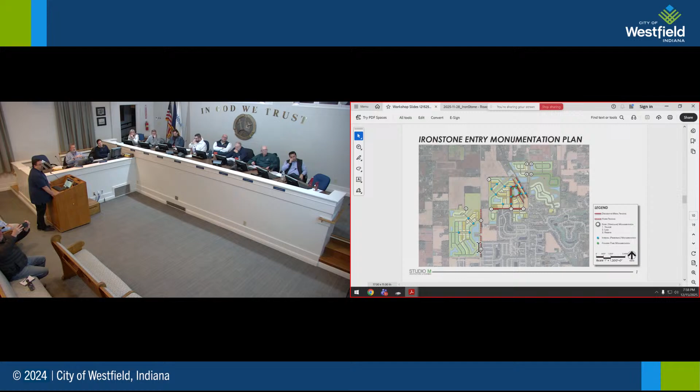If we look at some of those details, this is the design detail for the metal fencing and columns along 206th Street primarily, and at the north end of the development, marking the transition between different areas within the community. That same style of brick and stone columns carries throughout Ironstone at the four corners where you enter the site from the public walk—this element extends over the sidewalk. And this design element, similar to but not identical to that same design vocabulary, is carried across.

This would be at the lakes, at the two entrances along Six Points Road and the one entrance along 206. This is a detail regarding the fencing, identifying where it would be in common areas that the builder will develop.

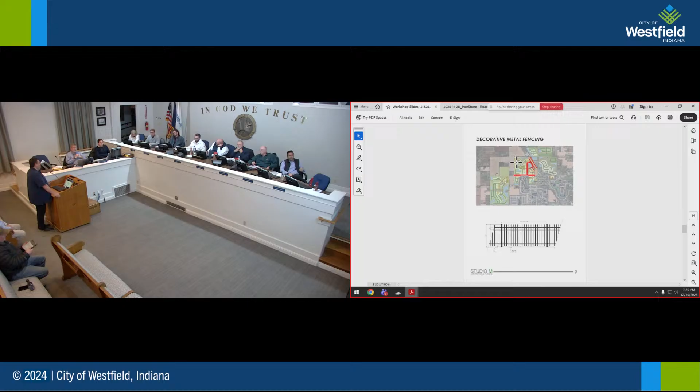One of the other questions we had was what kind of restrictions there would be regarding fencing for people on their lots. The restriction would be for metal fencing, similar in character to this. There wouldn't be a situation where you'd have vinyl, wood, and other fence types throughout the development.

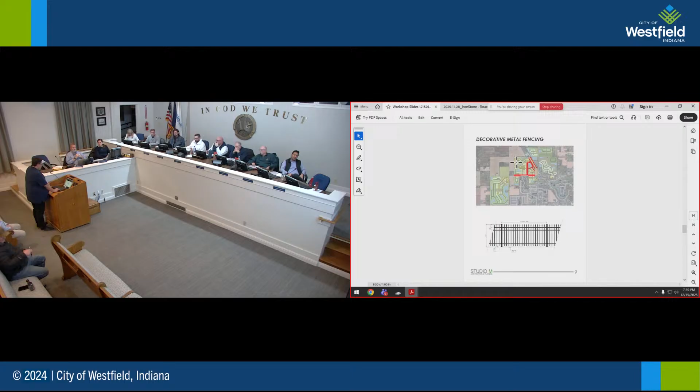Another big question was regarding open space, and we provided another exhibit at the Plan Commission meeting identifying where there's open space throughout the development. Typically, underlying zoning classifications in the UDO require anywhere from 8% to 15% open space. Proposed here is a minimum of 20% throughout the development, representing about 22%, not including the school facility, which is not counted as open space.

There's approximately 60 acres of open space in the lakes, and then you see the other two distribution elements across the site. The open space amenity east of Horton Road is predominantly through the low-lying area. There's actually some flood zone in there, and it's wooded through this space.

You'll see that in a minute in our tree preservation plan, but these are the areas of open space. The ordinance says open space shall be as illustrated in the concept plan. This is just a pull-up from the concept plan that helps us communicate effectively where there would be open space within the development, rather than relying on people figuring that out by looking at the concept plan.

This next exhibit is tree preservation areas. There's existing trees on the site predominantly east of Horton Road, which is the area I just talked about. All the trees within here will be preserved.

There is a stand of trees along the north perimeter of the real estate, and we're providing tree preservation along that north perimeter. There's also a stand of trees on the site here, where this element you see is a stormwater detention element.

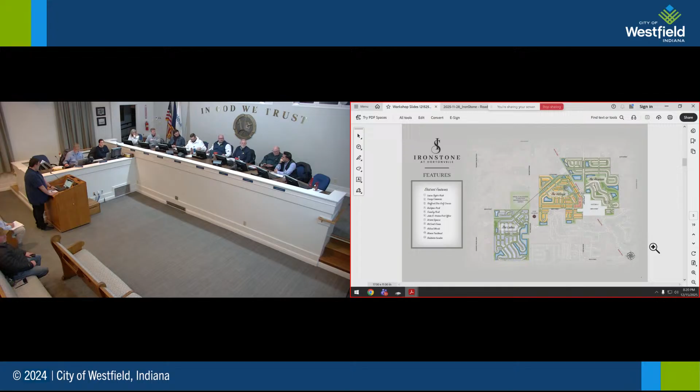Mr. Bunkefist: Yeah, a few questions. Number one, it's kind of hard to see, there's a slew of colors on this map. When we're looking at the villages, is it safe to assume that all of those that flank the Monon Trail in that northeast corner are townhomes? Because of how some of the lines are cut, it blends like it's maybe a type F. That's like confirmation on the Monon frontage right there. Yep, so when you zoom in, it looks like that is all type A townhome intention. Is that correct? It is. Okay, perfect. And so then, of course, that'll be alley loaded, so the fronts will be facing the Monon. Is that accurate? Yes. Okay, so the alley you see is the narrow strip behind.

The homes would face the Monon here, and it would face the backside. To add some specificity regarding that Monon Trail frontage, it wouldn't be a situation like in Carmel, where you have front sidewalks coming out onto the Monon. This would be a preservation of the existing trees in the Monon right-of-way with a separate sidewalk beyond that, so that it would collect and only connect to the Monon at a couple of select locations. Understood.

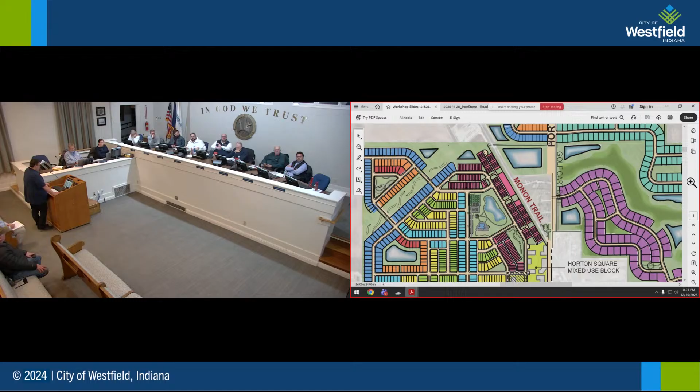The type C—I feel like I didn't like this first iteration, I'm still staring at it—that's south of 206th Street. For reference, I think it's the closest property to Chatham Hills. Just one second. Where are we going, over here? Right there, yep, correct. To me it just feels out of place. It's up against Chatham Hills, it's up against what you're showing as type K, which are nice renderings. That feels like it's being boxed in just to be boxed in based on the property that's owned. Not necessarily a fan—I'd prefer 3 to 4 type Ks in lieu of all the type Cs being shown. I'd probably like that a little better, personally.

In the space right here, or internal? Just internal in general, right? Okay, I mean you have your type K, and then houses directly to the south that are reflective of type K. And then you're putting what feels like a different use type between the two, and it just feels like it's going to stand out in a negative way to me personally.

And there's an existing church that sits on the parcel here, and this street is intended to tie in with the street further to the west. So it creates that situation like you see homes facing both sides of an internal street within Hortonville, but we'll take a look at that and report back to you. If that's the intent of tying it into Hortonville, of course we've heard staff's iteration of what Hortonville could be—maybe even pumping the brakes to understand what that broader landscape would look like, then come back and decide something could go there. Don't know, but that's my personal opinion.

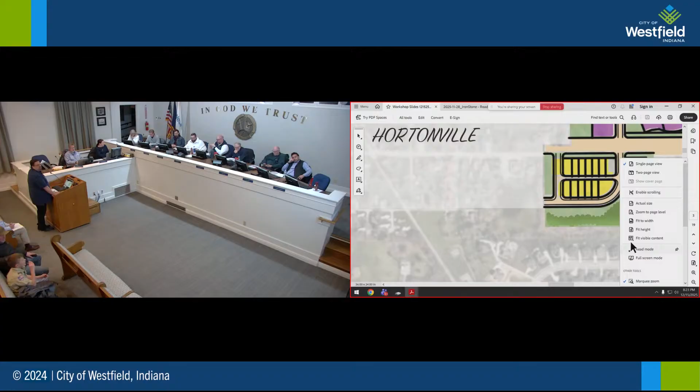What else? Within the village, I think I mentioned this on the first iteration - if you could go back to the trail system map, the Trail Network Plan Exhibit 10.

Maybe we just have different opinions of what a village concept would be. As I was looking at some of the permitted use types, I think four of them have front-loaded garages permitted within the village. Curious, when you're up against trail systems and promoting the village, what that would look like versus really rear-loaded, which is what I had in my head for a village connectivity concept.

Under the ordinance, 80% would be homes that have alley access, and the ones that don't have alley access are those that back up to the power line easement. So these are homes that would have a garage that faces the street, right here, and then just this narrow band here and a narrow band right there.

So anything that's up against easement and/or other utilities would essentially be front-loaded, and everything else rear? Yeah, alley-loaded along the perimeter of the site. Okay, so there's no side-loaded on there at all, I guess?

There are homes that are front-loaded, and there's a commitment on the front-loaded homes to have a garage that's set back from the street, so the home would be the predominant image from the street. That's one accommodation, but within this space those lots are narrower lots. There's not a provision to have a side-load garage within that plan.

It's not prohibited, but the question is, is it a permitted use under your PUD to have side-loaded garages? So I guess the distinction is, do you have a matrix in your head of what those two are going to be? Personally, I like side-loaded more than front-loaded in that concept.

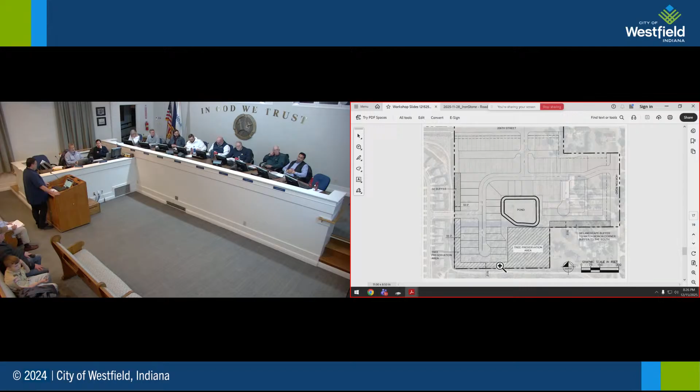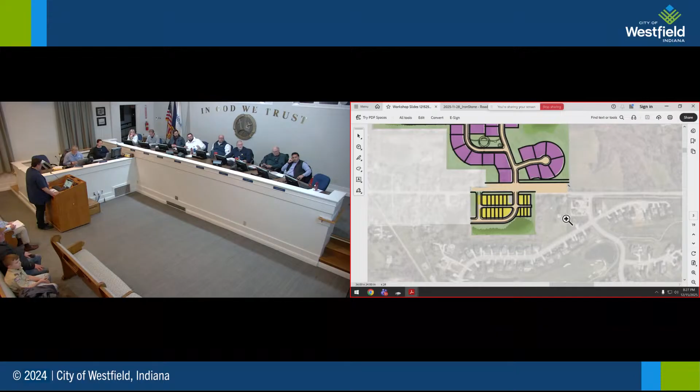Let me see. And then, the type K - to Victor's point, maybe when I say type K, sorry, big development here - but off of 206th Street, the type K that's up against the type C on opposite sides, right there. Looking at additional tree preservation opportunities along the street frontage, if there are any. I like the idea of that being more secluded, and if you can maintain some of that tree front, wooded, road front trees, there we go. I'd like that better.

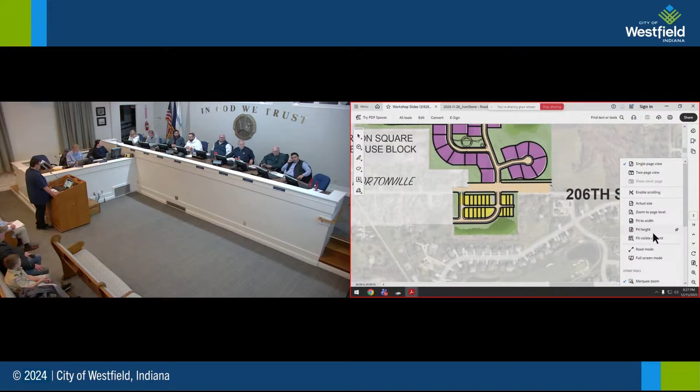And then lastly, you hit it on the head - love the public spaces, love what we're doing. Not the biggest fan of the lack of diversity in the homestead sizes. I know the whole goal of this is to be diverse, but it's a lot of the same of what I feel like we've seen already. So if we could get even more narrow - you provided a wonderful exhibit on type A, type B, type C - if there's a way to narrow that down even more to understand what is actually likely in our next workshop versus what is not likely. I know the point is to make sure the houses within each type differ from the one next to it, but I want to understand that a little more, because I have concern on builder diversity as well. With that, I'll stop talking.

Thank you, sir. Thank you.

Further questions, comments from commissioners?

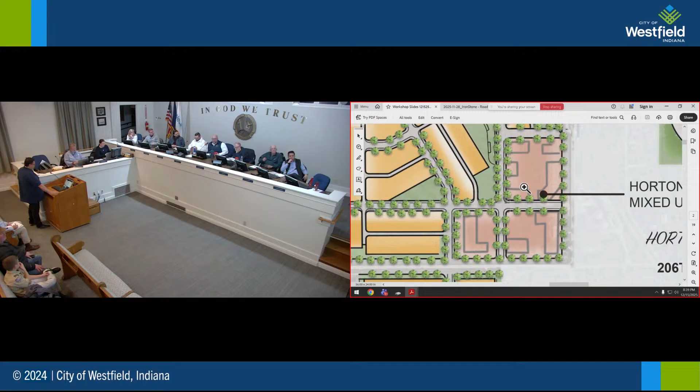I want to take a look at this map here, if you could, John. It's the northwest section of the lakes - that little outlier piece, I don't know what to call it, but yeah, right there.

So looking at the trail map, you don't have to bring that one up, I've got it here. I think one of the questions I had for staff is, other than to the north getting on 206th Street, there doesn't seem to be a connection to the larger trail to the southeast. Is that intentional, or is that being contemplated still, or is there a reason why? Maybe there's a good reason.

Staff had provided a thought - if it's not on this trail exhibit, it'll be added in that there would be a pedestrian connection between these two points to connect these residents over to the amenity. Okay, but the street connection was removed, sure, that's fine. But there is going to be some sort of pedestrian access to that. 100%. Beautiful. Both by sidewalk and trail.

Sure, great. Because it obviously kind of feels just like what Mr. Bunkefist was talking about to the southeast. It's because you own the property and the way it's connected, it kind of feels like an outlier, but I think being able to connect it like that would certainly help. So glad to hear that.

Let's see, sticking to trails, I'm kind of trying to put these in groupings - I didn't write them in groupings. On the trail map, especially kind of in this zone going up towards what will be donated to the school, the legend shows both a mixed-use trail parallel to a golf cart trail. Are those different trails parallel to each other?

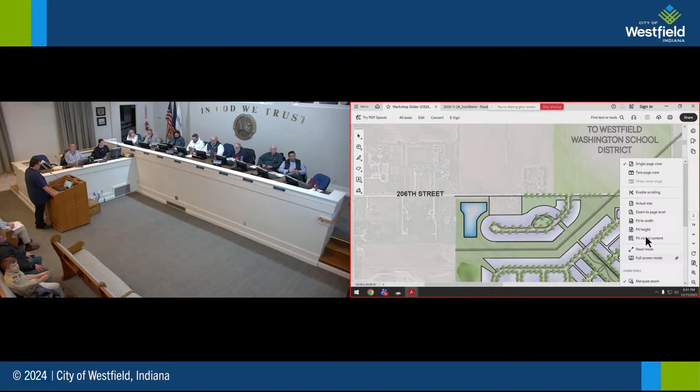Yes. And can you give - maybe you don't know, so the answer is I don't know, we'll talk about it later - I'm trying to envision what that looks like. I guess the one I think about the most, not that you would put golf carts on it, but the Monon in Midtown Carmel, where they have the walking path and the bike path that are kind of separate. What's the concept there, do you think? Or maybe you don't have an answer. There isn't an answer today, but I'll get you more information. But it would be that they're adjacent to one another, so we reduce potential conflicts.

Yep, with the exception of free will. You can't contemplate that in an ordinance.

Let's see, this is just a note. I think I mentioned this before for staff, not necessarily for you, but I also read it in Councilor Herron's comments. The trail going under 6 Points, just north of 206, having some sort of bridge or tunnel contemplation over time.

Let's see, I want to make sure I mark these off. Got that one, that one, that one, that one. Mixed use, golf cart, got that.

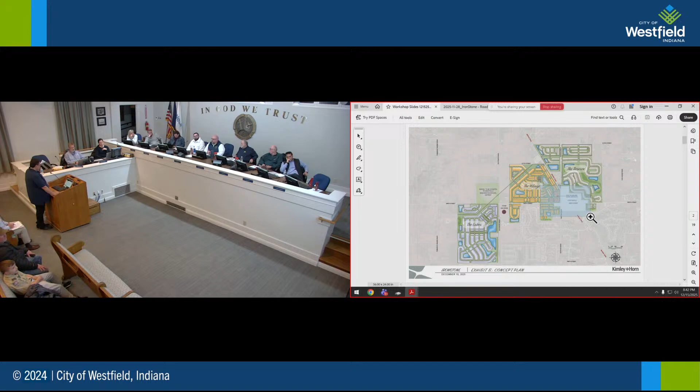Down in your commercial zone, if we could, I guess I really don't need the map of it. The streets, so obviously the commercial zone, you said is 7+ acres, but obviously kind of knowing what we have to do with it, there's a good portion of it that's going to have to go to parking. So there's not going to be 7 acres of building. There's obviously going to be some parking space too.

And I guess I would be concerned about that if there wasn't going to be such a grand plan coming before us at some point on the Hortonville expansion. So I guess I'm less worried about that. But the streets around the zone that you're building specifically, is there going to be street parking there?

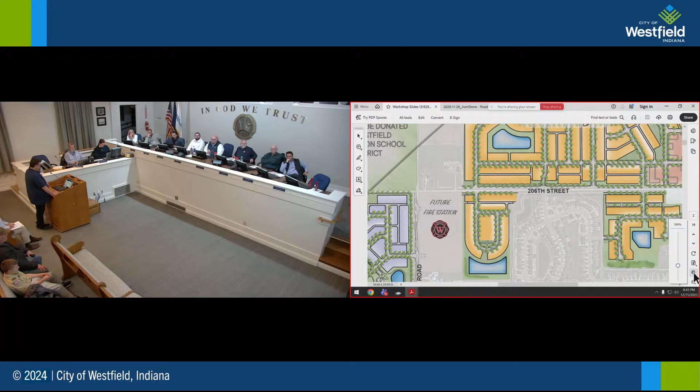It would be permitted, but it's not specified. Okay. And what we were asked to come up with, when the first development plan is filed for that space, staff had, and it's written in the ordinance, that we would provide a streetscape plan for the entire district, so that it would be determined at that time what the cross sections look like in the street sections.

Okay, it just depends. I don't think the staff has finished their analysis of what they would envision Hortonville Road to be, other than not 55 miles an hour. Oh yeah, I agree.

Let's see, so I've mentioned street parking. So that, for now, kind of ends my comments and questions related to that. But I appreciate, again, all the work that's gone into this. Like I said, I want to reiterate to everybody that if this goes through, we have one shot at getting it right. And I appreciate your partnership in that, what you presented to us tonight, and I know there'll be a lot more discussion to come.

So thank you very much for all of that. Thanks for your time. Absolutely. And I assume nothing else. I don't want to be the... okay, Councilor McCarty would like to, sorry, make one last thing.

When the map was over the southwest corner of 206 and 6 Points, it reminded me of some residents that have reached out to me. It's very concerning that residents are already receiving letters to have easements purchased from them. So I had said to them that I would mention it at the meeting. I just wanted to make sure I didn't forget.

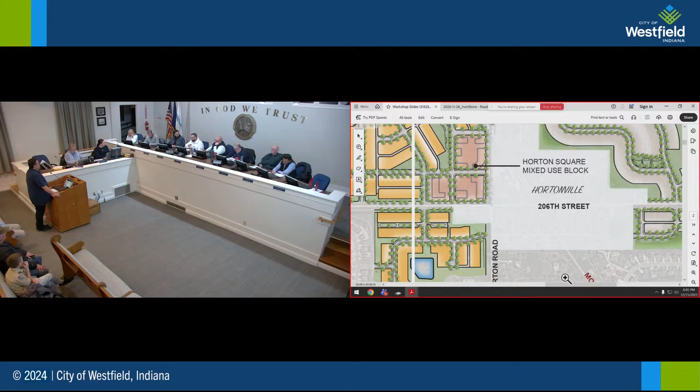Thank you very much. No other, I'm sorry, Mr. Bunkenfest. If not already provided, perhaps for the next workshop as well, for the village concept and even the rest of it, where you do have the front-loaded garages up against trail systems, if you could show rear elevations of the homes as well that are adjacent to the trail systems, that'd be appreciated. Thank you. Will do. Thank you.

Anyone else? I tried to cut you loose. Seeing and hearing none, thank you all very much. Really appreciate it.

Okay, with that, we have a number of items continued to a future meeting, including the comp plan, Harmony, LPH, and Sugar Leaf. If there are no questions about any of that, we'll move to our reports and comments.

Plan commission members to each other, any comments to be made? Seeing and hearing none. City Council liaison, Councilor McCarty.

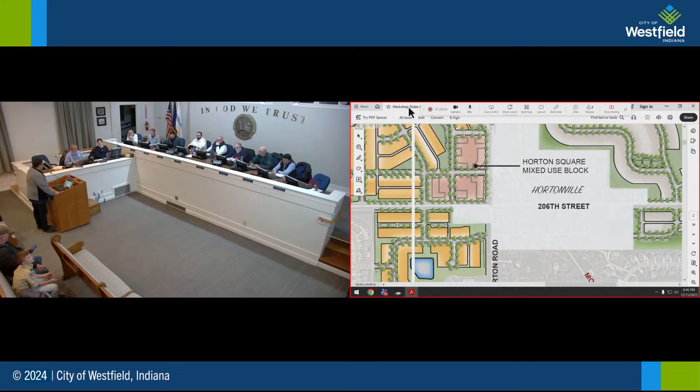Yeah, since I've started to email you all my updates, so just to touch on some highlights. We swore in 5 new Westfield police officers, so that was awesome to see them, their families filling the room. And then one additional item that I wanted to, two.

Heads up for everyone that might not have seen the email, the Towne Road Crossing PUD that was continued, so that has not received a final vote yet. And then, if you might not know, the Preserve at Cool Creek annexation.

That's a unique proposal where it's going to be annexed in 5 phases, starting on 191st, looping down, then coming back up to 191st to the southwest corner of Grassy Branch and 191st. This is unique because it's a straight zone project that was technically approved because of the zoning that already carries with the land, but also it's already been at Plat Committee last March 2024. So it's kind of just a unique case study of all the different types of development that can go on in Westfield and how annexation works. If you have any further questions on that particular proposal, please let me know. But that is all, thank you.